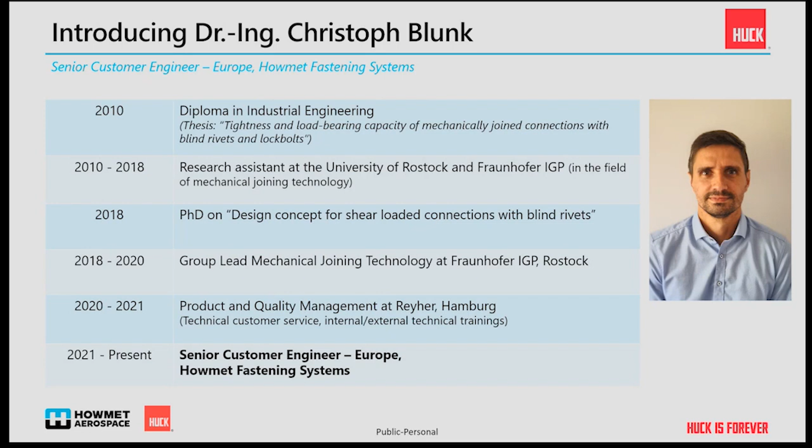Besides my job as a webinar lecturer, I also attend a lot of research projects where we are involved as Howmet Fastening Systems. Our fasteners are constantly involved in different research projects, so we always get the latest results for the use and application of alternative fasteners like blind fasteners and lockbolts. So you will also see some current results from research here.

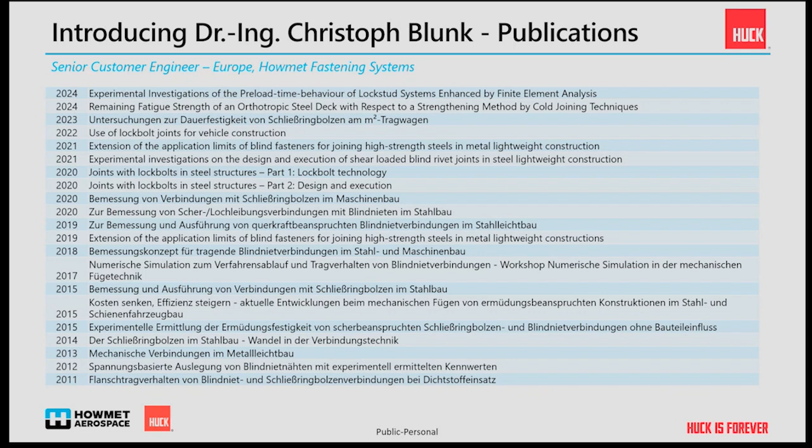Before I go too much into detail, I just want to introduce you to the Lockbolt technology in general, and then switch to more detailed information about how to use lockbolts in steel construction, closing with some examples of our projects where we have been involved in steel construction, and also how you get the most use of our fastening solutions.

So it's a very wide variety of applications, and we hope that we can also bring some benefit to your applications.

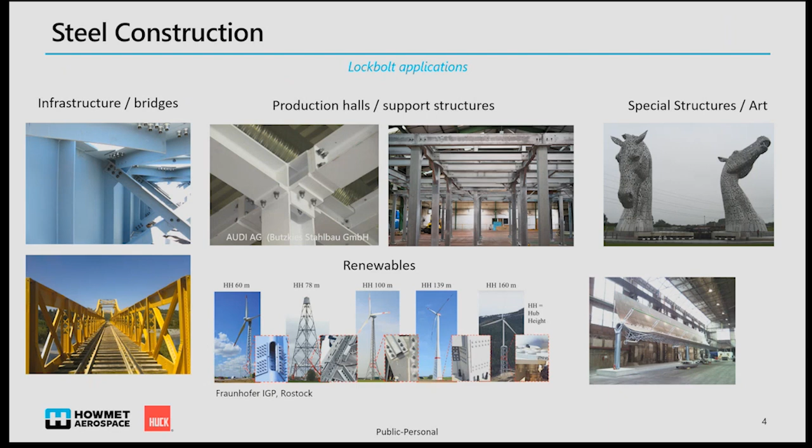Normally the design of steel structures, especially in civil engineering, is regulated by the Eurocode, which is valid for nearly 10 years now. The Eurocode is a very large regulated area, regulating all different kinds of steel applications like steel bridges, cranes, pilings, silos, tanks, and also towers and masts.

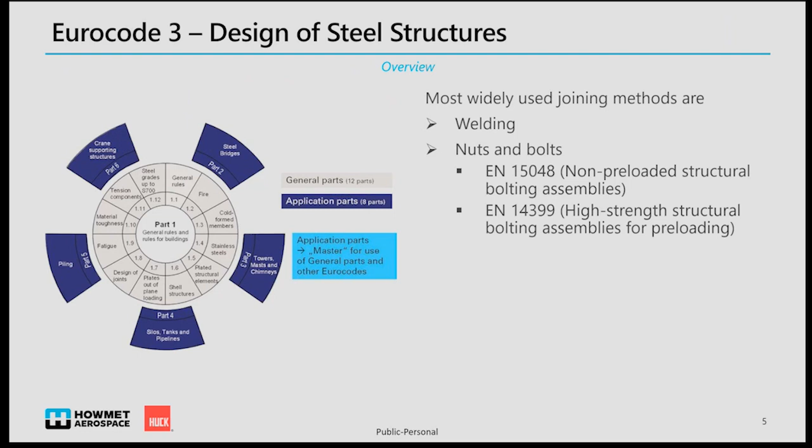The most widely used joining methods are welding, of course, but also nuts and bolts. The most widely used bolts are non-preloaded structural bolting assemblies according to EN 15048, or EN 14399 for high-strength structural bolting assemblies, where a defined preload is applied during the tightening procedure. So these are widely used, but they don't come without any challenges.

There are certainly some benefits, for example, to use welding to join structures, but often the preparation and after work is very expensive and time consuming. You also need a qualified workforce, so there's regular re-qualification required. All the welders need special certificates for the different welding methods.

Also, you can't join coated components. Normally, before welding, you have to prepare the joint, and after welding, rework and recoat. This also often comes with additional effort in terms of transportation, if you can't do everything in-house. So a lot of parties are involved, which makes it more complicated and also expensive.

During welding, there's often a lot of heat involved, and this quite often results in distortion of the components, so there's also rework required. For very large structures, often the components need to be preheated or cooled down before the joining and further assembly process can continue. And of course, another big disadvantage is that only similar materials can be joined, so they must be suitable for welding.

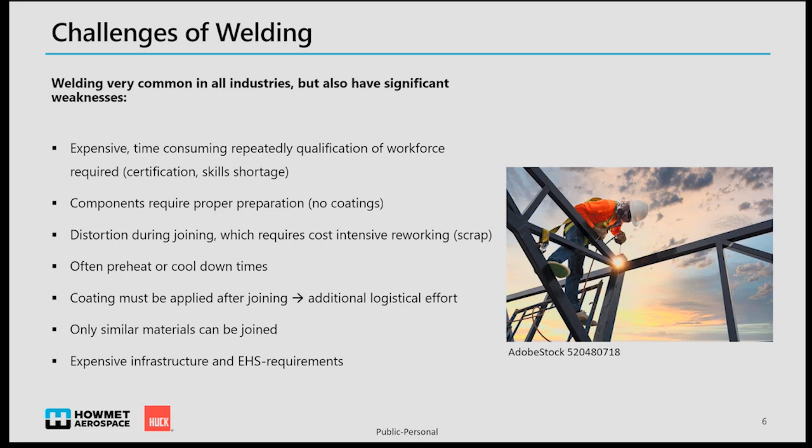So, of course, mechanical joining methods are a good alternative. A very big advantage for mechanical joining is that you can pre-assemble or pre-manufacture every component. They can apply the final coating, transport it to the location where the structure should be erected, and simply join without any rework. But with the most widely used nuts and bolts, there come also some disadvantages.

One main disadvantage is applying the preload into the joint. This is always a very complicated process. It looks quite simple from an outsider, but the preload which results in a joint is influenced by different factors. One is the coefficient of friction, which can be influenced by lubrication or surface coating. But also you need an accurate tool for applying a preload.

For example, if you want to use joints in steel construction for execution class 2 or above, you need a calibrated tool. This is also a requirement which must be met. Otherwise, you can't be certain that the torque is accurate. And since the torque is not equivalent to the preload due to the friction under the head or bearing areas and in the threaded area of the matching threads from nut and bolt, there can be a very high scatter of preload.

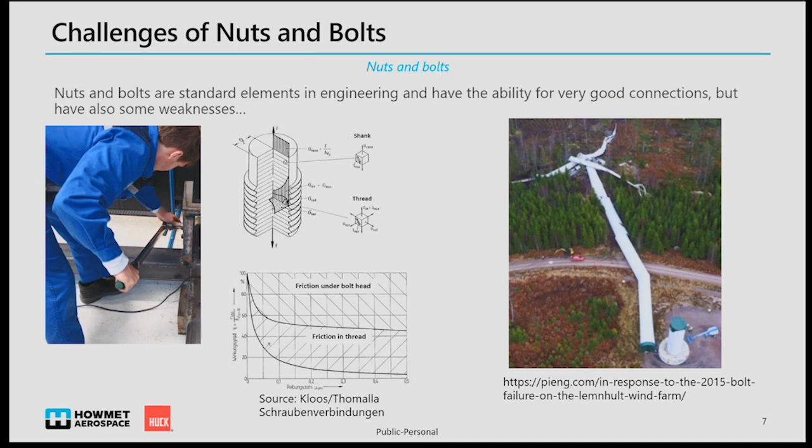Basically, the preload depends also on the tightening method you choose. So if you use, like you see in the picture, a hand wrench, it's less accurate compared to a calibrated hydraulic drive. There are many influencing factors which cannot always be assured to stay constant during the installation.

Besides the surface condition of the fastener itself and the components, there are also some environmental conditions. For example, if you have an installation somewhere in the field and the fasteners get dirty, or it starts to rain during installation, the coefficient of friction can significantly change and result in either a too low preload, which will not guarantee sufficient preload for the design.

So if you assume the full preload, for example if you have a slip resistant connection and only half of the preload is applied during the change of the friction coefficient, the structure could fail before reaching the estimated service life.

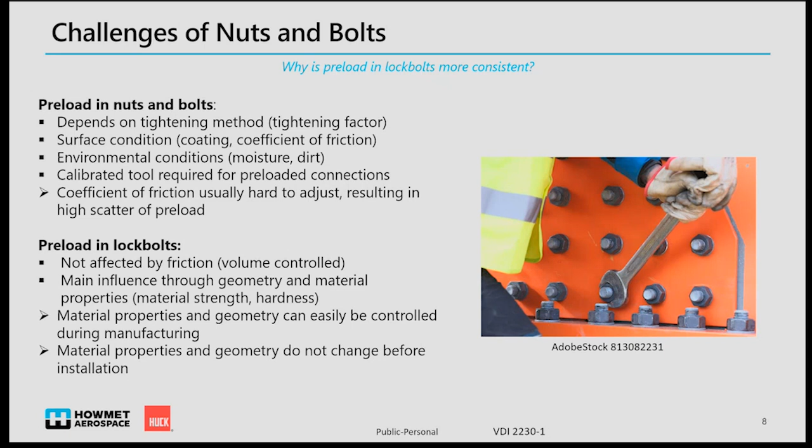Why these change during installation we will see in just a few seconds. But before that, I still want to introduce you to the Lockbolt technology in general. A Lockbolt is a two-piece fastener made of usually hardened metal, consisting of a pin and a collar. Depending on the type of Lockbolt, we have sometimes Lockbolts with flanges and flange collars. Sometimes there are Lockbolts with pin break and without pin break.

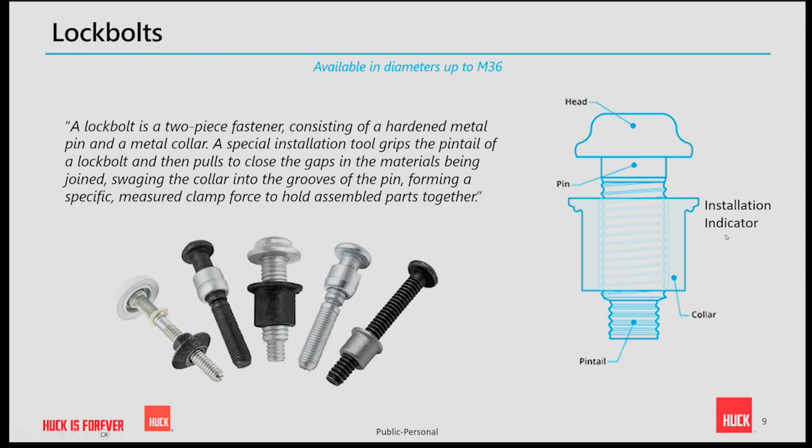The BobTail is available in a wide range of diameters, starting with 6.4 millimeter quarter-inch up to M36 for very heavy steel structures. The installed performance of the Lockbolts is in accordance with the ISO standard 898-1, so we have also a similar strength grade on the pin. The pin consists of a medium carbon steel and can be hardened to different steel grades. The collar, in difference a little bit to a conventional bolt, is not in accordance with any standard, but it is matched to meet the minimum values of the pin.

So you have always a system consisting of a pin and a collar. These two must match to achieve the best results. Otherwise, it won't work.

Some of the Lockbolts also have a feature like the helical lock grooves to allow for easier assembly. For example, fasteners with pin breaks don't have helical lock grooves, so it is always a bit more complicated to install these, for an overhead position for example.

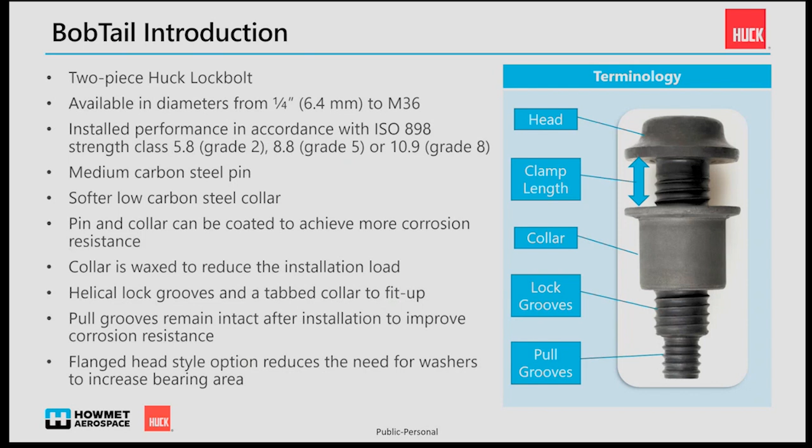How is a Lockbolt installed? This is basically the biggest difference compared to conventional threaded fasteners. For a Lockbolt, we have an axial tightening procedure.

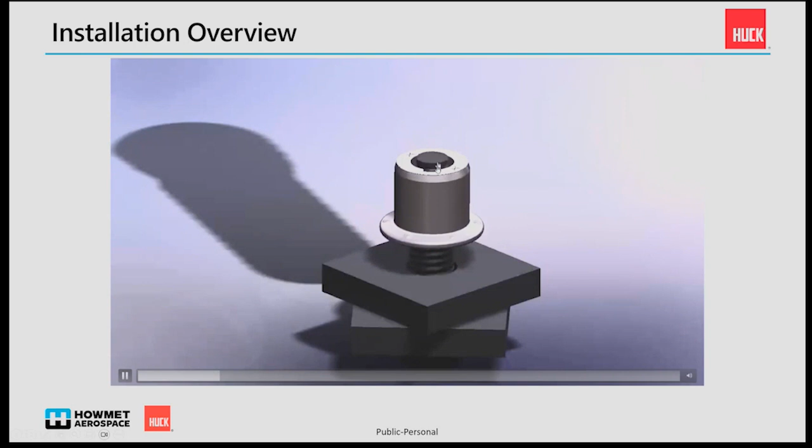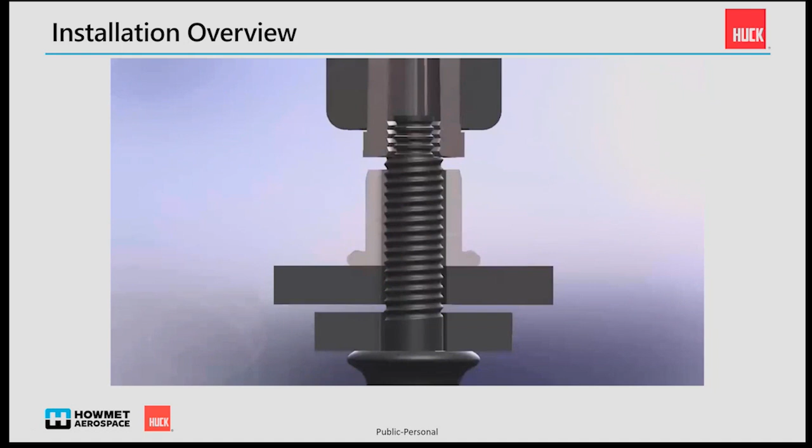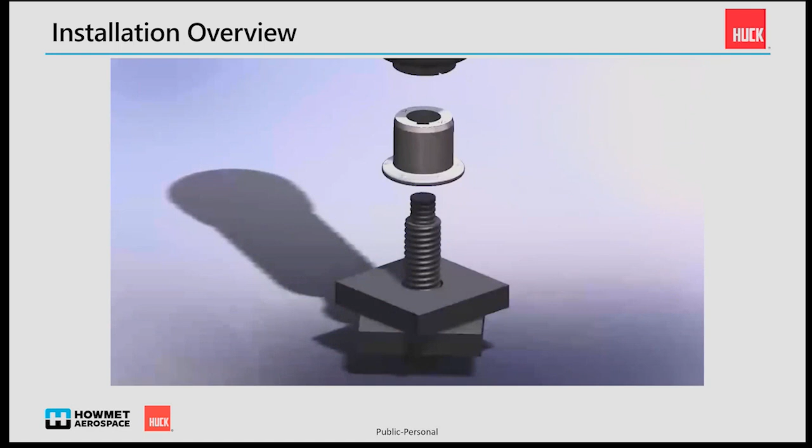We see here that the pin tail will be attached to the tool, and then an axial load is applied to the pin. The anvil of the tool drives over the collar material and swages it into the lock grooves of the pin, creating the determined preload and at the same time achieving a safe and secure joint without any risk of self-loosening.

This process is usually very fast compared to conventional tightening methods for nuts and bolts. For a typical size of 16 millimeter, the installation procedure normally doesn't take more than 2 seconds from hitting the button until fully swaging the collar material into the bolt.

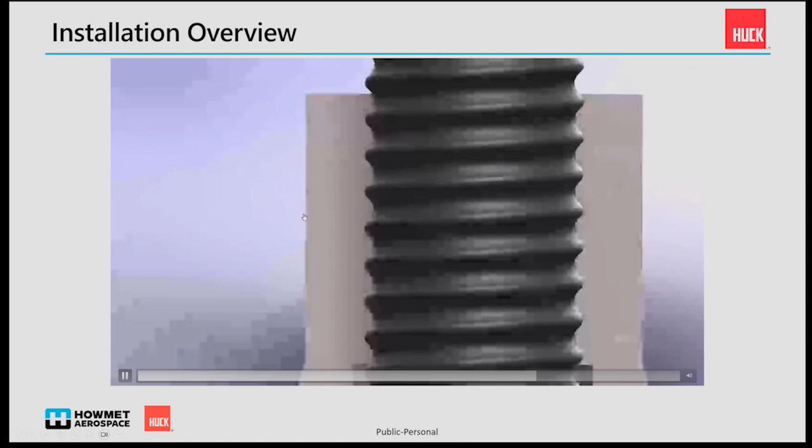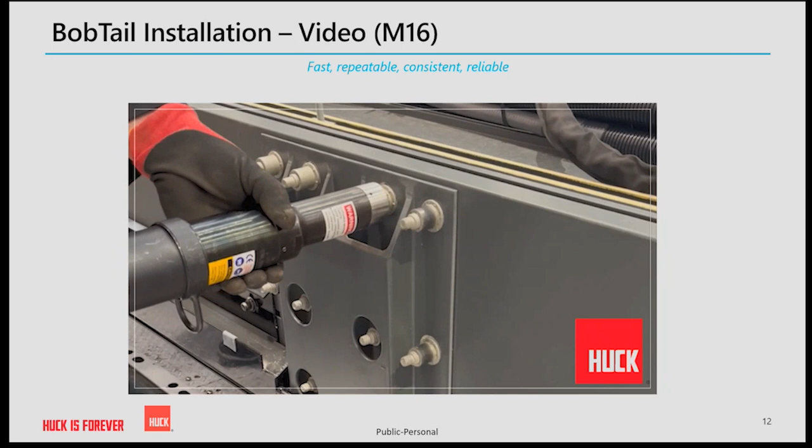To get a better impression of the installation, I also included a short video so you can see the joining process in real life. As you can see, the tool is placed on the pin tail of the lock bolt. Then the button is pressed to start the process, and the swaging does not take more than 2 seconds. This was, for example, an M16 millimeter diameter lock bolt.

So what makes it so different to conventional threaded bolts? I already mentioned that the preload of a threaded fastener is normally highly affected by the friction coefficient in the threaded area, but also on the bearing areas of the fastener.

This can be due to environmental conditions, as I mentioned. The moisture has a very big effect, but also the lubrication itself can age and is highly influenced by the storage conditions. That's why we often see a high scatter.

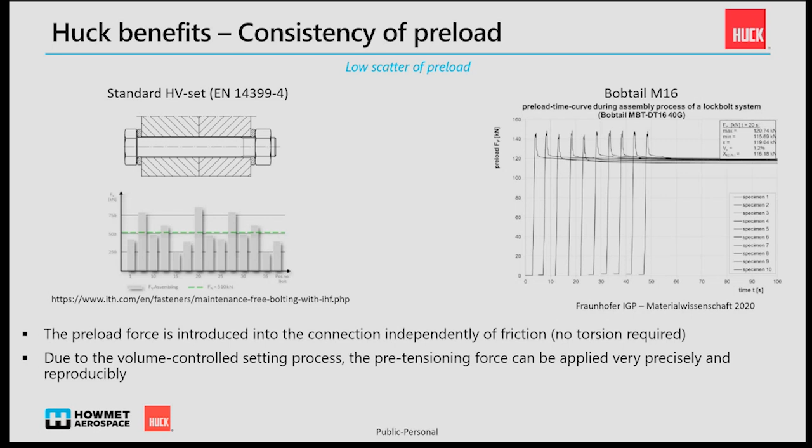Another big advantage compared to conventional nuts and bolts is the inspection of our fasteners. The bobtail comes with a special feature on the collar flange. These are so-called swage indicators.

If you have applied the right force during the installation to the tool, then you will see the swage indicators being deformed by the anvil of the tool. This gives you the assurance that the full preload has been applied.

We also have some fasteners which do not have swage indicators, but then we also offer an alternative solution using a so-called ring gauge. These two methods give you the assurance that the full preload has been applied.

When you look at a nut and bolt, you normally can't see if the torque has been applied 10%, 50%, or 100%. So that is a very big bonus here for using a Lockbolt.

So the rework or installation retightening procedure is completely obsolete. If you need to document the installation procedure, we also offer the so-called SureSet system. This is a device that can monitor and record all the installation, and it can be saved to your quality system.

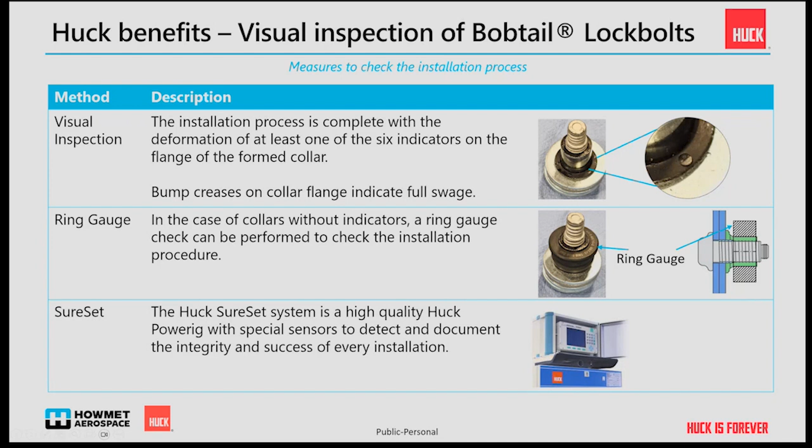This assures the vibration resistance of our fasteners and also the high consistency of the preload. With a conventional nut and bolt, you see always a certain gap which allows the assembly of the nut, and this all results, under high vibration loads or fatigue loads, in a self-loosening of the nut and bolt in extreme cases.

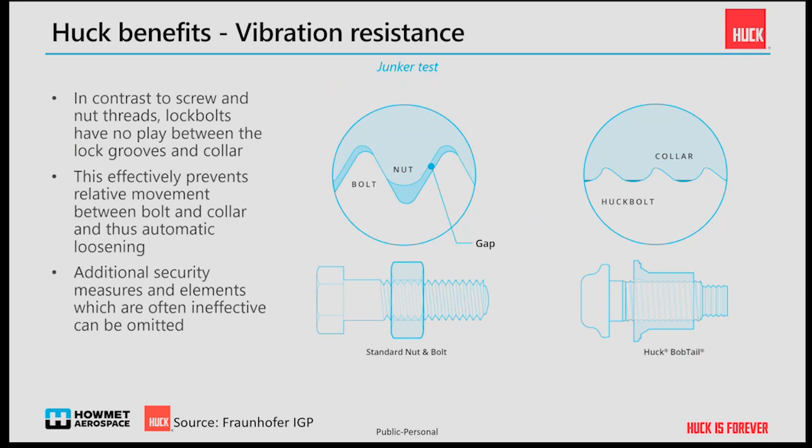Of course, you can use certain securing elements to secure a threaded fastener, but this only works on certain applications. For example, there are restrictions regarding the material strength of the components and also the surface or coating thickness of the components. And you always will see some embedding, sometimes damaging the surface protection.

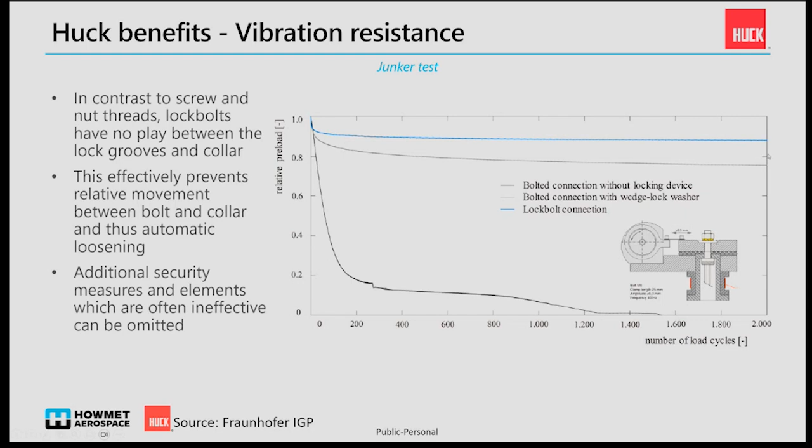The special design of the Lockbolt in regard to the lock grooves also results in a very high fatigue resistance. When you look at the conventional thread, as we have seen on the previous slide, there's a very sharp notch in the thread area, and this leads to stress concentration, resulting in a very low fatigue resistance of a threaded fastener. Just to get an impression, the fatigue resistance of a threaded fastener is usually not more than 10% of the static load capacity, mostly even less. Due to our special thread design, we have at least 3 times the fatigue resistance of a conventional threaded fastener. This has already been tested in a big test program.

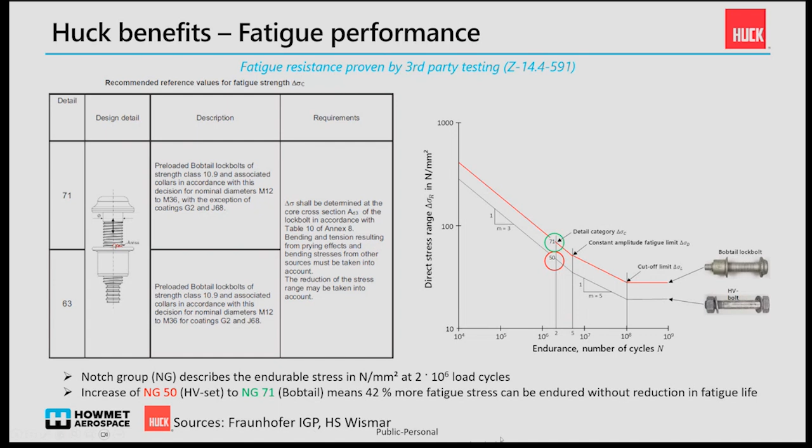Since the difference doesn't look very significant if you just look at the plain numbers, it makes a bigger impression when you consider that an increase from notch group 50 to notch group 71 means 42% more fatigue stress can be endured per square millimeter, for the same diameter basically. This could result in using a smaller size of Lockbolt, or even using fewer fasteners in total, if you switch from HV bolts or threaded fasteners to Lockbolts.

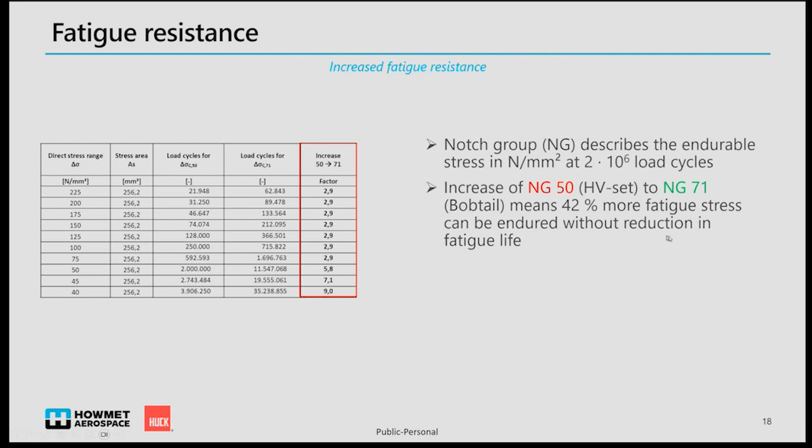That sounds probably very promising, but this is not just a marketing value. We have seen our fasteners resulting in very high fatigue resistance also in some research projects.

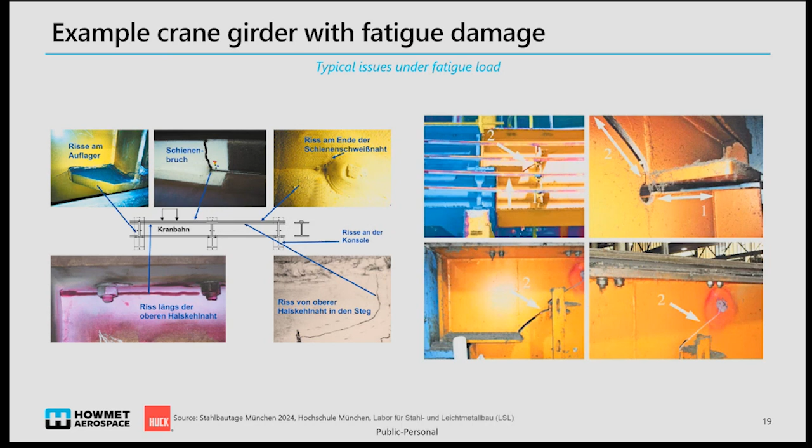In this research project, which was conducted by the University of Applied Sciences in Munich, there was an intention to investigate different repair methods for older welded structures to increase the remaining service life. In this project, 6 different joining methods were compared against each other.

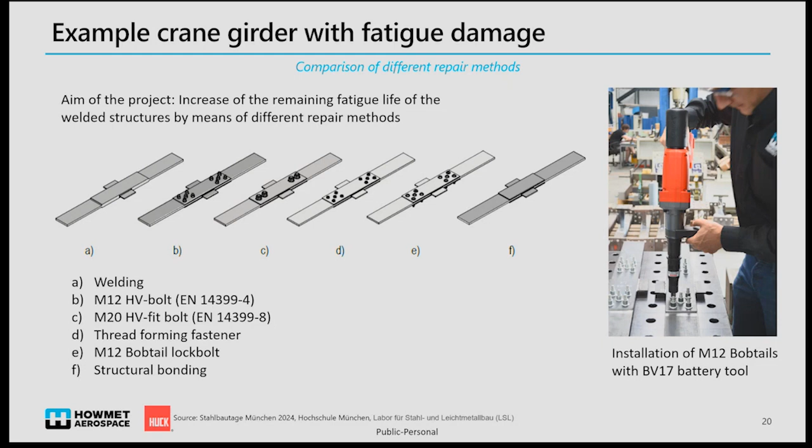The first method was a conventional welding method, then a standard M12 HV bolt was used, also an M20 HV fit bolt, a thread forming fastener, and an M12 Lockbolt, and as a last method, a structural bonded joint was tested. On the right-hand side, we see the installation of the M12 Lockbolt using a battery tool, and these specimens were then loaded into a test machine.

In this case, the Lockbolts and also a thread forming fastener were used for further investigations using a pre-stressed specimen, which were then reinforced with this repair method. In comparison to the damaged welded structure, using Lockbolts there could be achieved an increase of the remaining fatigue life of more than 30 times that of the damaged structure. So here we can see a very good result in a typical application.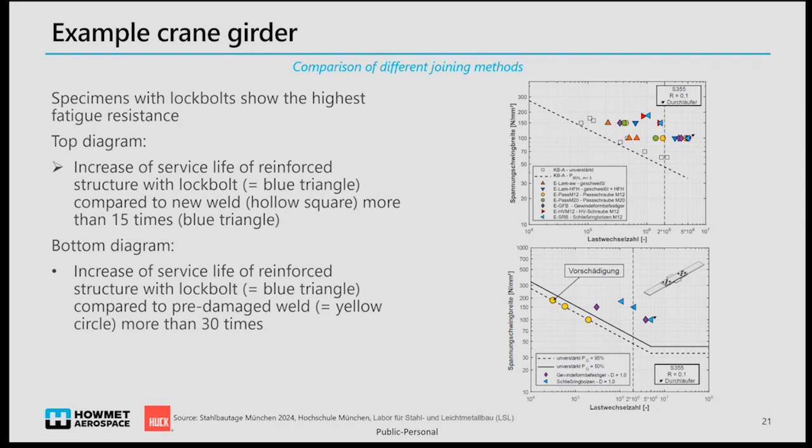What is the requirement to be able to use Lockbolts in steel construction? This is always a question we see when discussing with our customers. The civil engineering or steel construction area is a very regulated field. Typically for civil engineering structures, you can only use standardized products. So either the construction product must be in accordance with a national or European harmonized standard, or you need a special approval. For our Bobtail, for example, we have obtained national approval with the German Technical Building Authority.

During the approval process, we have done a lot of testing in terms of shear, tensile, fatigue, but also preload. And this can now be used as an alternative to the mentioned preloaded bolts.

But for the rest of Europe, typically a European technical approval is required. At the moment, we are still waiting for the publication of the assessment document in the European Journal. Hopefully this will not take too much time until it is released, and we can transfer our technical approval to the European technical approval.

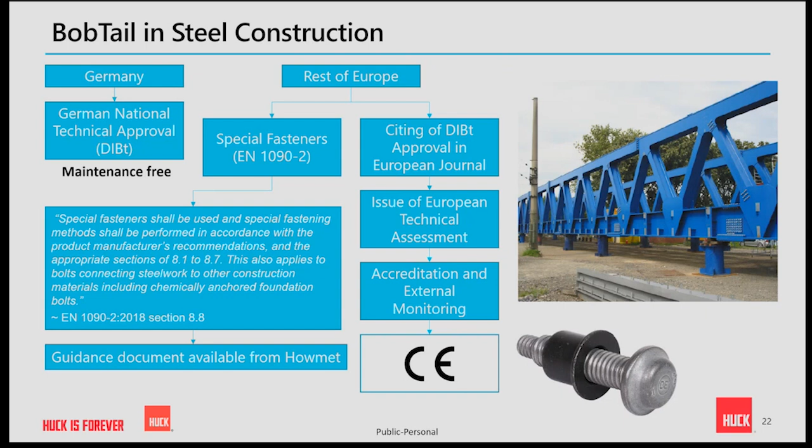But on the other hand, there's also the possibility to obtain a type approval for certain constructors, or to use Lockbolts as special fasteners in accordance with EN 1090-2. We will support this with guidance. If you have any questions on how to apply Lockbolts to your constructions, please contact us. I will provide the contact details at the end of the presentation, and we are happy to help you use Lockbolts in your structures.

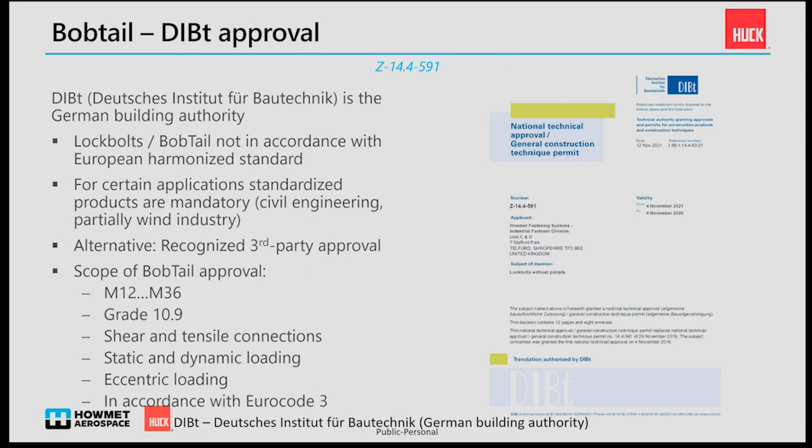If you want to design joints with Lockbolts, the national technical approval from the German Building Authority is probably a very good guidance. This includes Bobtail diameters M12 up to M36 in grade 10.9, and covers shear and tensile connections for static and dynamic loaded constructions. There are also design rules for eccentrically loaded structures included, and all design rules are in accordance with Eurocode 3. This means you can basically substitute the values for HV bolts, HR bolts, TCB bolts with the values stated in our technical approval, and apply these to your structures to gain access to the high mechanical performance of our fasteners.

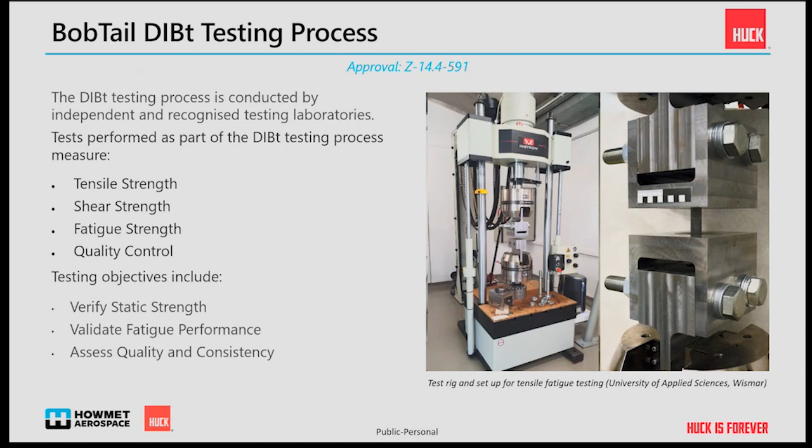As I mentioned, the DIBt testing included tensile tests, shear tests, fatigue tests, and also regular quality audits of our manufacturing site. During the process, we did a lot of preload tests, also a lot of shear tests with preloaded and non-preloaded structures.

Different surface preparations were investigated, and we have also been involved in numerous research projects. So basically, if you want a slip-resistant joint, you can use the surface preparations in accordance with Eurocode 3 in the EN 1090-2. But also other alternative surface preparation methods to increase the slip load factor were investigated in public research projects. If you need any additional information in this regard, please contact us after the presentation, and we are willing to provide the necessary information.

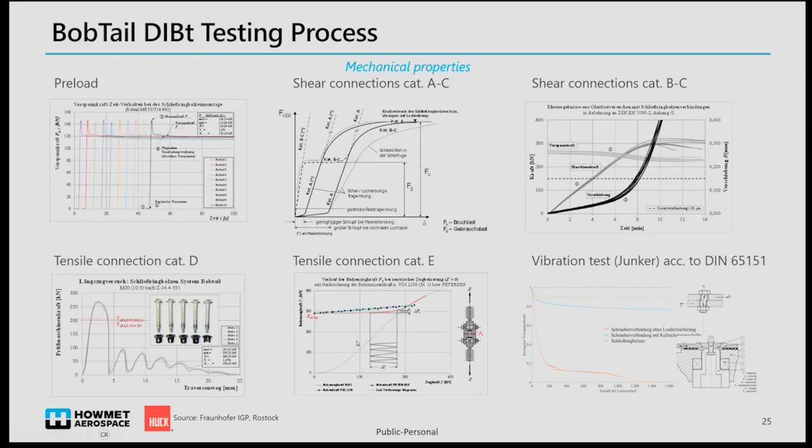Not only shear connections can be used with Lockbolts, the tensile load bearing capacity was also investigated, as well as the preload time behavior under tensile stress. Basically, Lockbolts can be used for any category covered by the Eurocode, from category A to category E. All the criteria which need to be fulfilled have been tested and evaluated, and all the design values are published in our national technical approval.

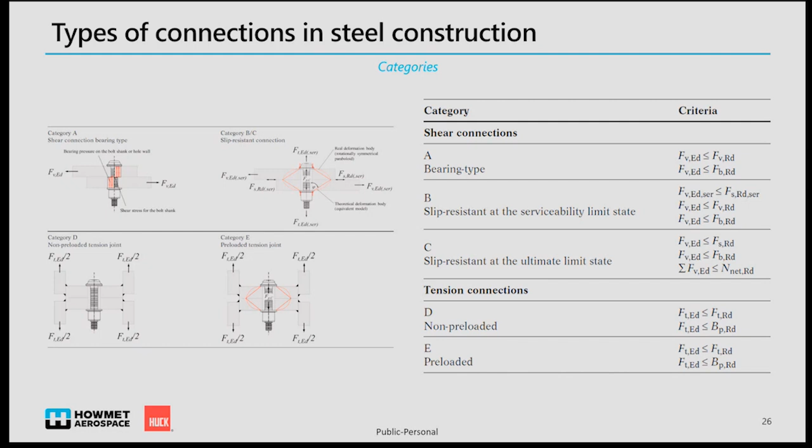We also provided a little technical guideline or leaflet for the use of Bobtails in steel construction. If there's any question remaining, let us know, and we are happy to support.

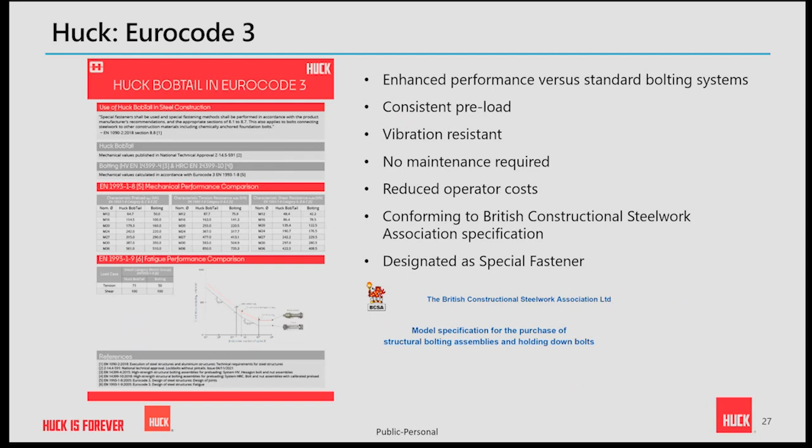For other Lockbolts besides Bobtail, there are also technical bulletins or guidelines for the design and use of Lockbolts. By the EFB, the European Research Association for Sheet Metal Working, where I was also involved, we developed two different guidelines: one introductory guideline for Lockbolt systems, where all the properties and general use of Lockbolts are explained, and the second part covering the design rules. So if you intend to use another fastener than the Bobtail, like a C50 Lockbolt with pin break, we are also happy to assist with the design knowledge published in these guidelines.

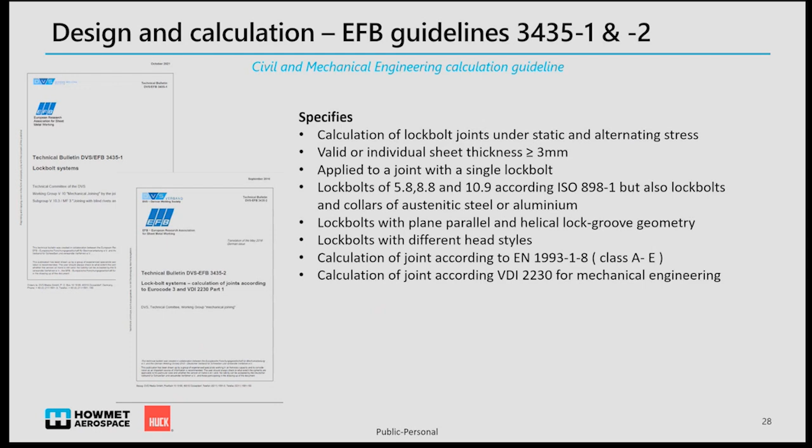To find the right fastener, we have an online catalog.

Here you can search for a certain part number, but also select a certain product type, diameter, or material, and then you will get a direct result regarding the clamp values, tensile resistance, shear values, the grip range where the fastener can be applied, and also the geometrical dimensions of the fastener, the available surface coatings for corrosion protection, and also information on which tool can be used for installation and what other equipment you might need.

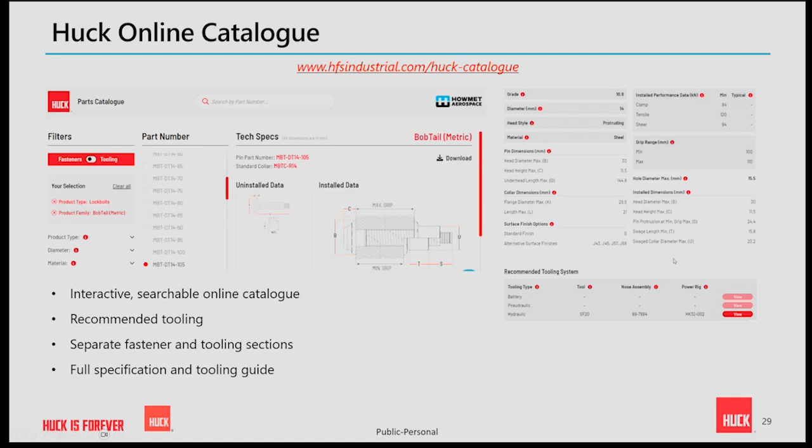If you can't find the relevant information, please don't hesitate to contact us directly, and we will support you in finding the right fastener.

In general, we have different installation methods and tools, depending on the fastener type and diameter. Hydraulic installation tooling can be used for any diameter up to the largest diameter of 36 millimeters. It usually has the fastest installation speed and uses a separate hydraulic or battery power rig.

Battery tools are, of course, more flexible and easier to use, but due to the high installation load for larger diameters, their use is limited to a maximum of 14 millimeter bobtails. You can use the battery tool, but if you have a high number of installations, it might be more efficient to use a hydraulic powered rig. Typically, the battery tool charge is sufficient for 300 to 400 installations.

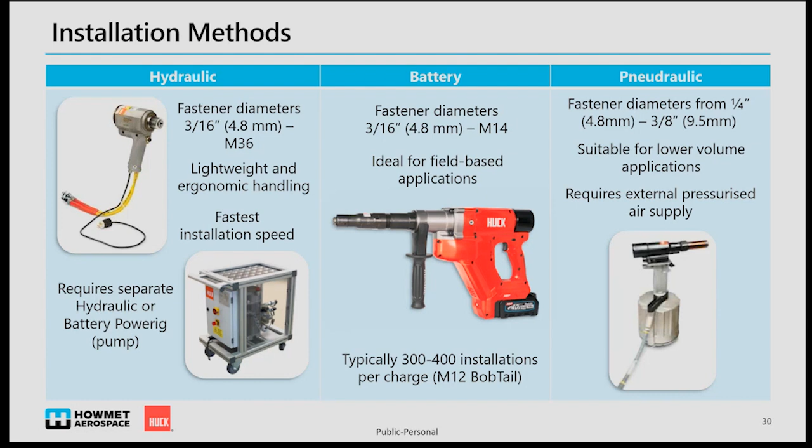The pneudraulic tool is also a third alternative, suitable for small to medium-sized fasteners and lower volume applications. But of course, you need an external pressurized air supply. So depending on your conditions where you want to install the fasteners, whether in the field or in the factory, we will help you find the right tool for you.

Regarding corrosion protection, we offer a wide variety of different coatings. Here you can see a fastener type and the matching different coatings with the corrosion resistance in hours. These are the uninstalled performance values before installation.

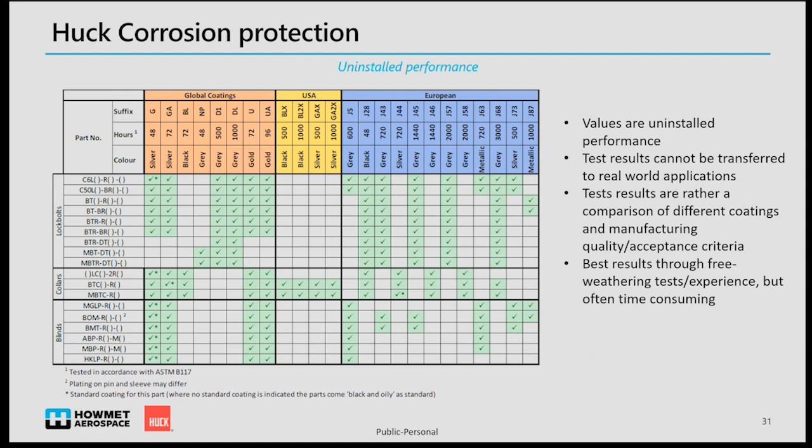As you have seen during the presentation, the collar will be swaged during the installation process. That's why some of the material properties change during installation, and the surface condition of the collar also changes slightly. That is also why we have done field tests and lab tests with installed fasteners.

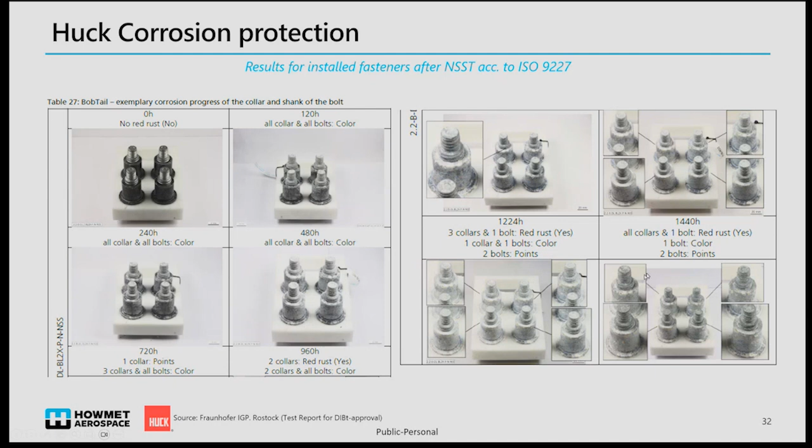Besides the general spec for our coatings, we also have results for installed corrosion performance. For example, here you can see the results after 1,440 hours in a salt spray test for the bobtail with a zinc flake type of coating.

But since lab tests don't always resemble the real world environment, we are also involved in public research projects where we have done free weathering tests with our fasteners. On the right-hand side you can see, for example, some results after 2 years of exposure on the island of Helgoland in the North Sea. This was a quite strict test.

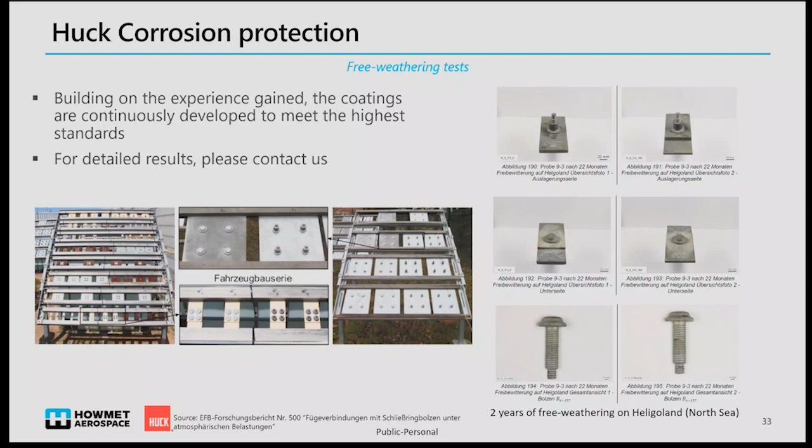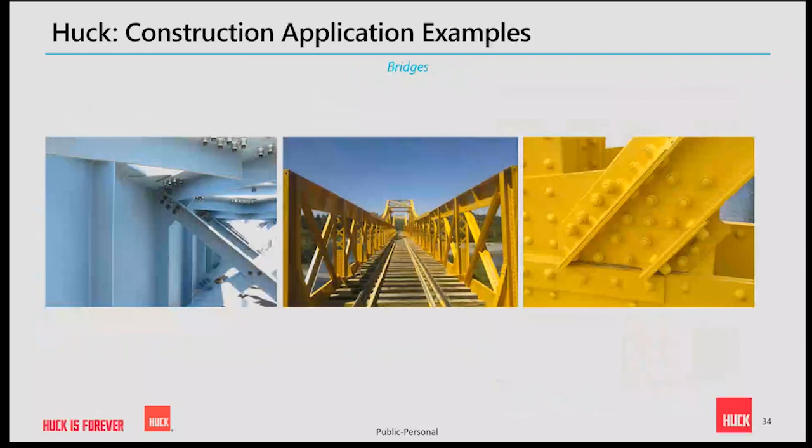Exposure in the real world sometimes shows even better results than the harsh lab test. So if you have any special requirements regarding corrosion resistance, we are happy to support you with further information. Some of our coatings are already approved by the German Building Authority, but we are constantly testing our coatings and improving performance with our suppliers. If you have a special need, let us know and we will provide you with the latest results.

To get some impression of where bobtails are used and why, I have also prepared some examples from steel construction. For example, in Germany in 2014, a big boat lift was built, and we provided lockbolts for the rope discs. In total, 112 rope discs were assembled.

They had a diameter of 4 meters. Due to the long service life of the structure, which is 80 years, the requirement was to have a maintenance-free joint, so nobody wanted to remove, retighten, or maintain these joints. We supplied a total of nearly 27,000 fasteners, 240 per disc. These were installed into the structure and are now in service, and hopefully will also be for the next 70 years in service without any complaints.

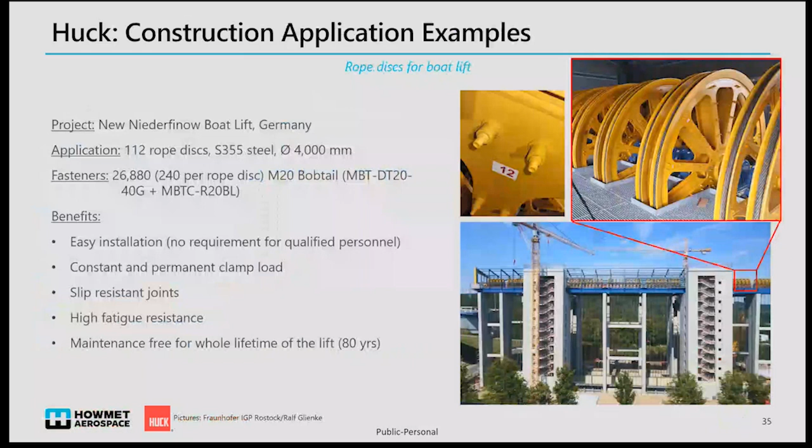Another application is in manufacturing halls where you see a lot of vibration due to machinery, for example, or goods handling equipment. And so the Lockbolt is a very good fit here. We have seen some customers complaining about nuts or bolts on the factory floor.

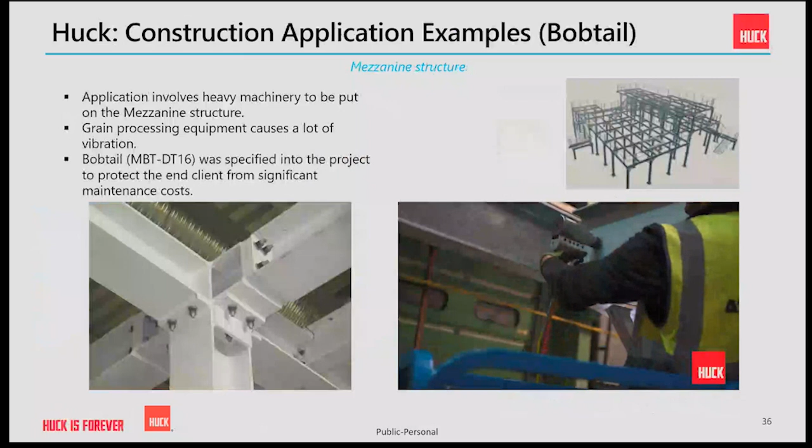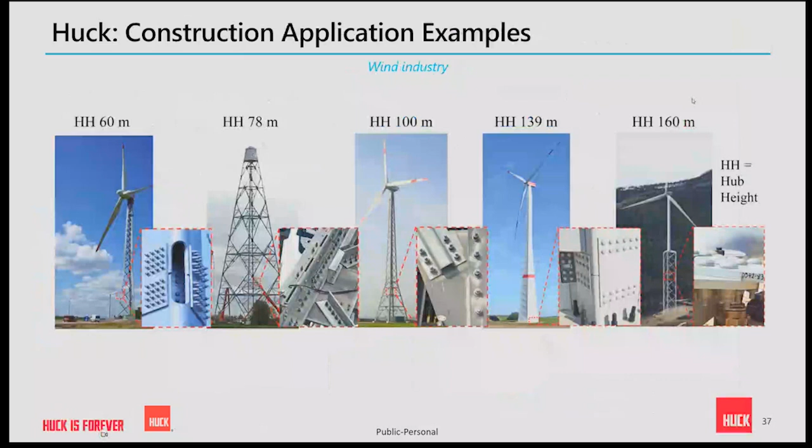I mentioned also that a lot of projects we are involved in the wind industry. So here you can see different tower designs, and these tower designs also use bobtail lockbolts due to their high fatigue performance and also to the fast and easy assembly and installation process, and of course due to the maintenance, or no requirement for any maintenance, in mechanical terms. So with increasing height and also power of the wind turbines, also the service life increases.

At the moment, the service life of a wind turbine is between 25 up to 30 years. So in such a structure, you can't send somebody up the tower to retighten bolts on a regular basis. And so the bobtail offers here a maintenance-free, high-performance solution.

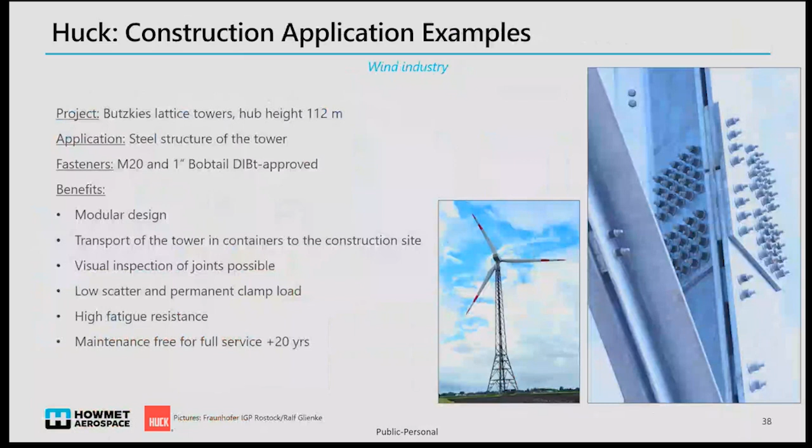This specific tower was erected more than 10 years ago, close to the North Sea. We have also done some inspections after now 11 years, and we see the joint in generally good condition. Only a few fasteners showed some corrosion on the pintail of the pin, probably due to not correctly applied tooling. So sometimes if the tool is not attached correctly, we see some local stress and some of the coating is damaged. But the collar and the pin itself, which are relevant for the structural integrity of the joint, are still in very good condition.

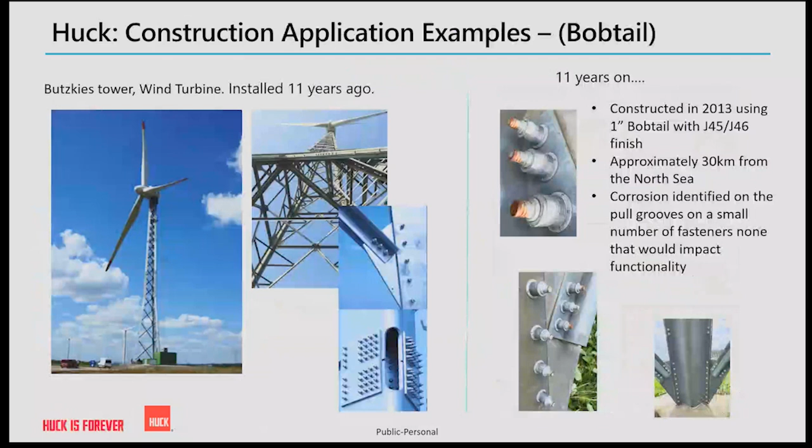So within the 11 years, there was no maintenance done on the joints, no retightening necessary. These stand there without any additional work to be done for probably the next 10 years at least. The tower location is not far from Hamburg, approximately 30 kilometers from the North Sea, so we have a maritime climate there with salt in the air, and based on these conditions, we see very good results.

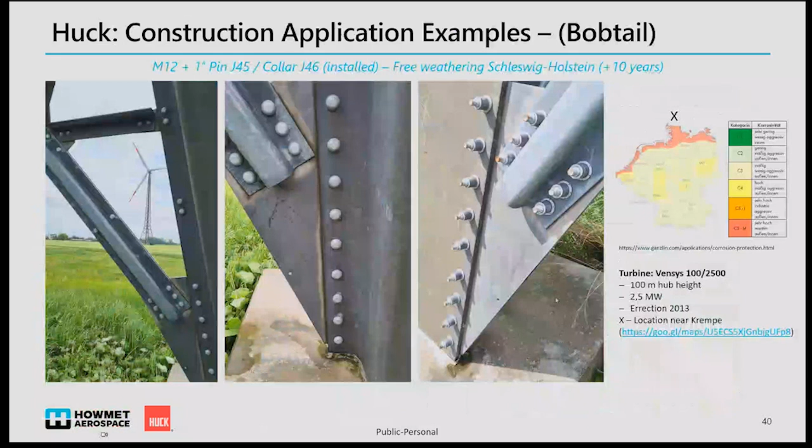Depending on requirements in your joint, we also offer sometimes a stainless solution in aluminum, and probably for our listeners or attendees from the UK, they probably know this structure. This is the Kelpies monument in Falkirk in Scotland, and each of these horse heads is 30 meters high and weighs around 300 tons. Here we provided around 12,500 stainless half-inch C50L lock bolts.

The customer wanted a fast installation without any issues in regard to galling. For example, if you want to install a threaded fastener, you always have to use some kind of lubrication, otherwise the nut and the bolt will gall, and it's not possible to apply a defined preload. Also, preload scatter is an issue because the structure is exposed to high winds and a lot of wind loads, so it's a dynamic structure. Since there were more than 12,500 fasteners used, it was impossible to maintain the joints, retighten them, and check for preload. So that was also a reason to choose a Lockbolt.

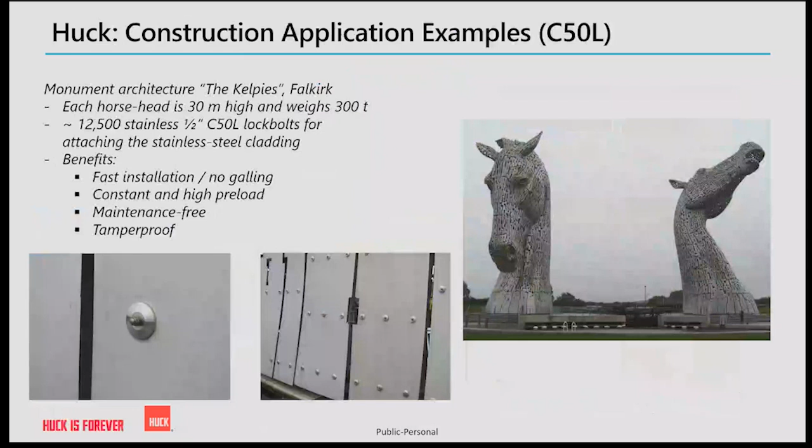Also, since this was made of stainless steel, it should be tamper-proof to avoid any tampering.

So in summary, Huck Lockbolts are engineered for fast, safe, and accurate installation. They usually do not require a high level of qualification for the personnel. The training takes only a general introduction, a couple of hours, or a one-day training to get used to the tooling and the fasteners. Installation is usually done in under 2 seconds, and the fasteners are suitable for category A to E connections in accordance with Euro Code 3.

They have unmatched static, fatigue, and vibration resistance, and maintenance-free joints can be achieved using Lockbolts. There's no need to check joints at regular intervals or retighten them, and this saves valuable assembly time, but also, especially for customers, the lifetime cost is significantly reduced.